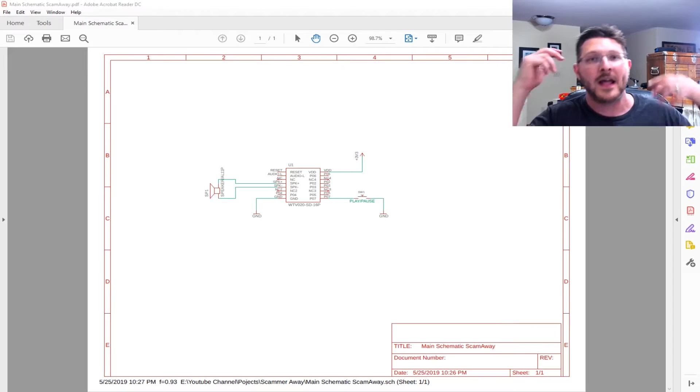So in order to do this, we're going to be using a pretty cool little component that I found. I believe IC Station had this for a little while, but it looks like they discontinued it. They went with a bigger module, and I really enjoyed this one because it was so small.

It was a very small module, but it's the WTV020, and I think there's some other variant, maybe the M01. I have one right here. They are tiny, if you can see that. Hopefully it'll do it, but they are very tiny.

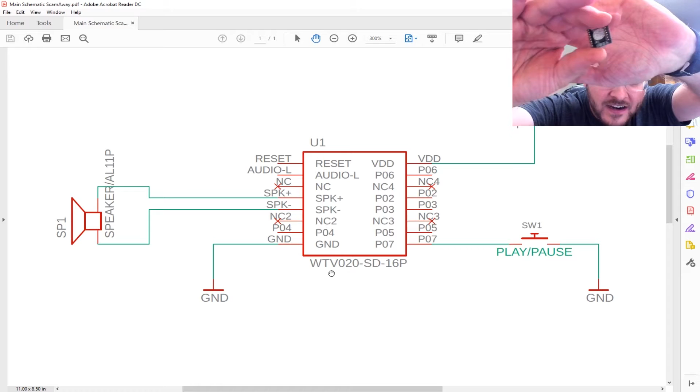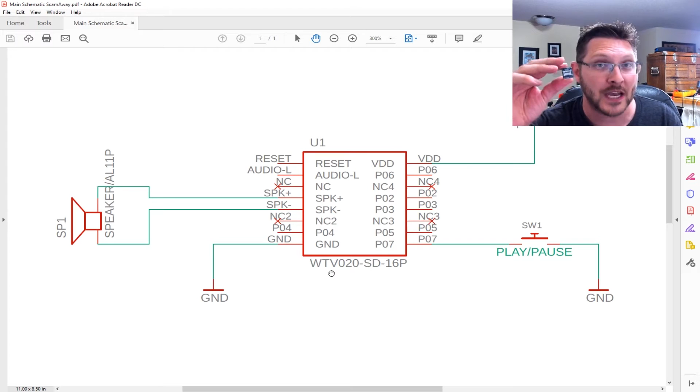Basically what it is, it's a small MP3 player. It takes a micro SD card, so you can buy some cheap little 2 gig one. In fact, the smaller the better, because this can't index very high memory, so you don't want to put an 8 gig in there - it won't work. So what I did is I downloaded some 2 gig, even though it recommends 1 gig or smaller. I got a 2 gig one, and it seems to work just fine in this thing. So 2 gigs is what I'm going to be using. But just find the cheapest card - doesn't need to be fast, just as long as it's a micro SD card, it'll fit just fine in this little guy.

So that will be the first thing we need. We also need a small little speaker, just a simple flat pack speaker. I think I found mine on Amazon - I'll maybe put some links down in the description for you guys, as well as where to find this. Now, where you can find these nowadays is good old eBay, or as AVE says, Fleabay, right? But you can find these.

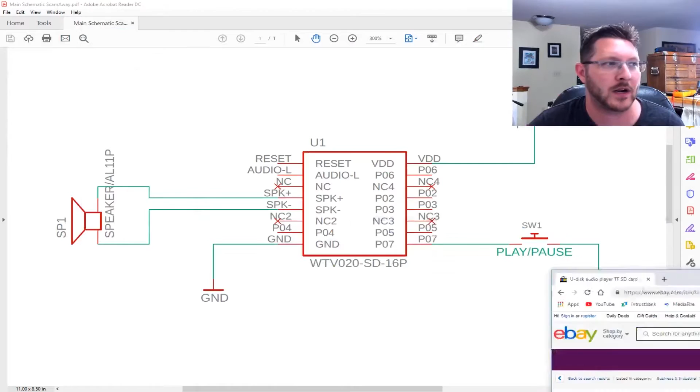They're only a few dollars, super cheap, but these little modules work great for what we're going to be using this for. I'll put links down in the description so you guys will be able to tell. But you just need that, and you just need a little push button, a tactile push button. We'll go through and look at it and see what it is.

So what we're going to do first is, this is the good old schematic. We're going to hook up our VDD. It's a 3.3 volt device, so it's going to be using either coin cell or lithium cell batteries. You don't want over 5 volts.

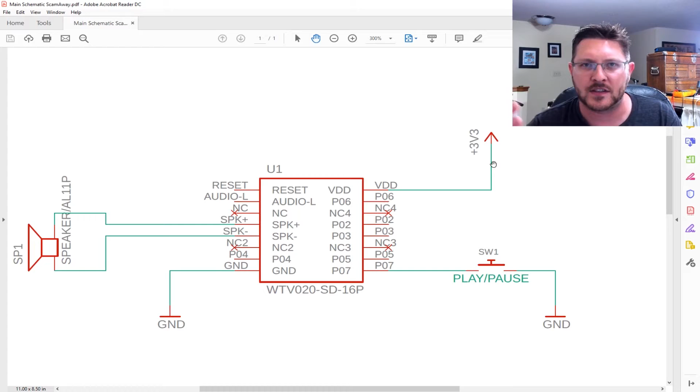Now, there's an option on the board where you have to cut a trace or solder a jumper, I can't remember which, if you want it to run at 5 volts. But you would still have to regulate something like a 9-volt battery to get the 5 volts. Since lithium batteries are generally 3 volts on their own, they work perfectly for this.

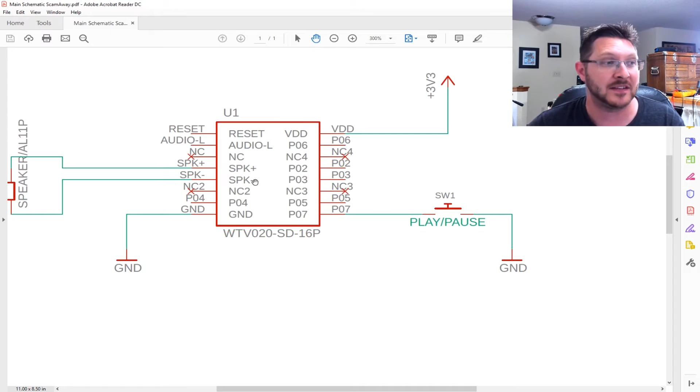So you need a 3 volt and ground. The speaker goes to the speaker pins, pretty straightforward. Then we're going to put in a play-pause switch, so you can press it to play, and press it to stop it once it's done playing. That goes off of pin 7 here on the little chip. So that's it, very, very simple schematic.

So now we need to build the 3D case that this is going to go in. So for that, into Inventor. We're going to build a little case here that's going to have a top and a bottom, and it's basically going to have a little button on the side.

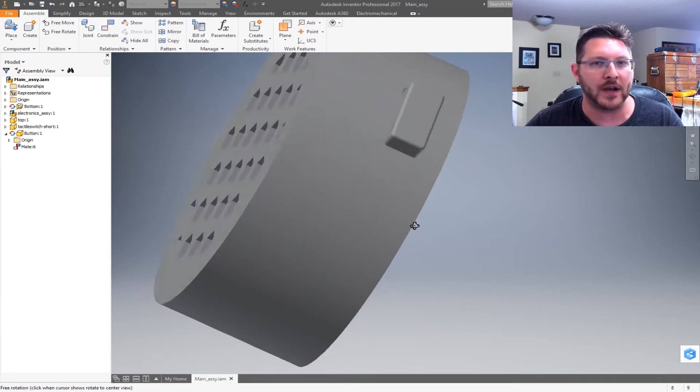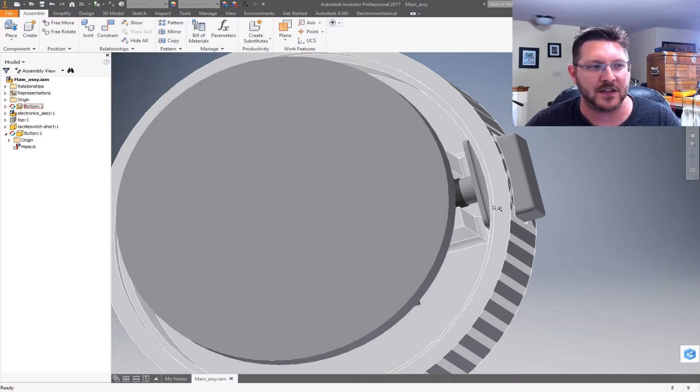Now, I had messed up in my file. I'll probably correct this before I post it for you guys in the link down below. As I'm recording this, I forgot to post this. But basically, if I take the top off of it, I didn't think about getting the switch into it, so you just have to cut this little bridge right here off, or I'll fix that in the model.

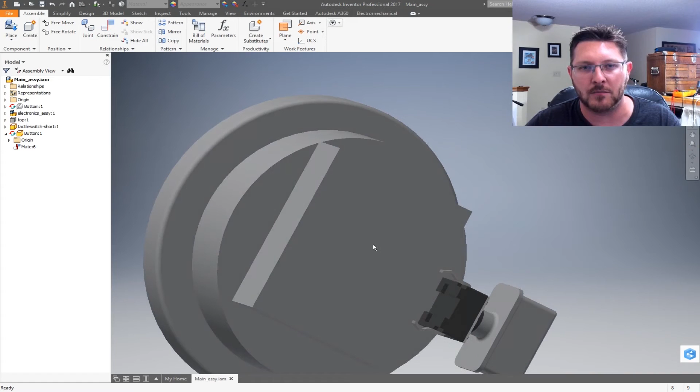But basically this chunk of plastic right here needs to be removed so you can actually get the button in there. What I did was I modeled up the speaker, the coin cell, and the little module as a general idea to get how thick this is going to be. Yes, I know this is hitting right here, but in the actual device it's fine. Just to get a rough idea of the size I have to deal with, I put that together to get sizes.

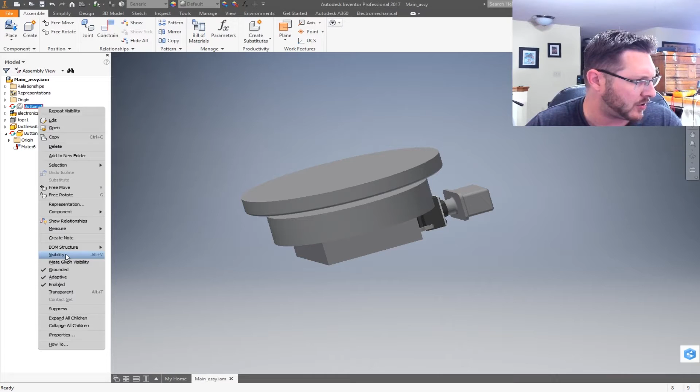So let's go ahead and turn this back on. Let me look over here so I can read it. So there's the bottom. I also made some inside edges, as you can see there's an edge right here, so that way it snaps together.

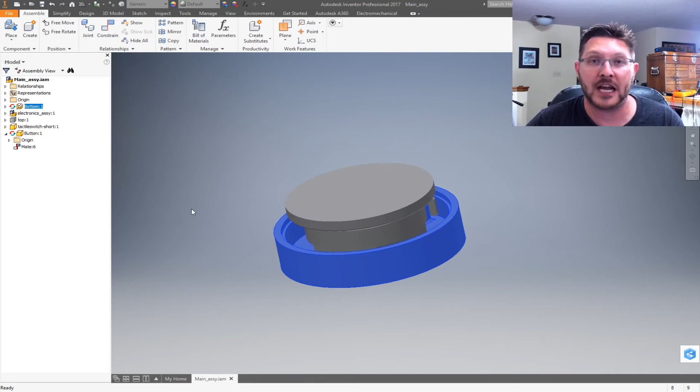So all we've got to do is 3D print out the button and the case, and we should be good to go. Then we'll just make some quick little solder connections to match our schematic here, and we should be good.

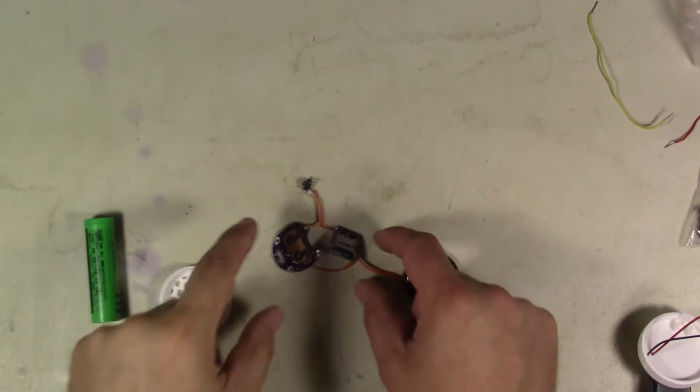Okay guys, so here we are with all the pieces. However, I noticed something that was quite of a caveat. Didn't really realize how much amperage this guy actually takes. So the coin cell battery is not going to be enough oomph for it to actually work right.

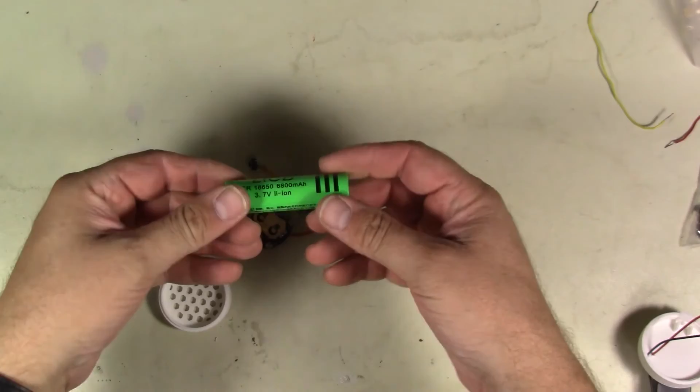So what we're going to do is use one of these 18650 batteries. Problem was this draws so much current, this guy was dropping way below 3.3 volts. It was going down to like 2.5 volts, and it just wasn't going to work for us. So we're going to switch it out to a 3.7 volt lithium ion battery.

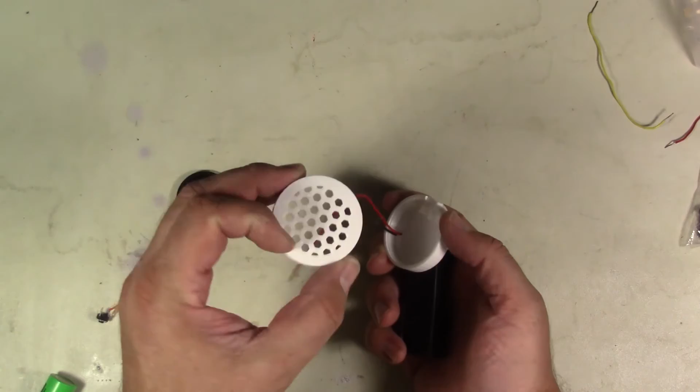So all I did to make this little change is with our cool little 3D print. We've 3D printed the case here, so there's our speaker grill and all of our other pieces.

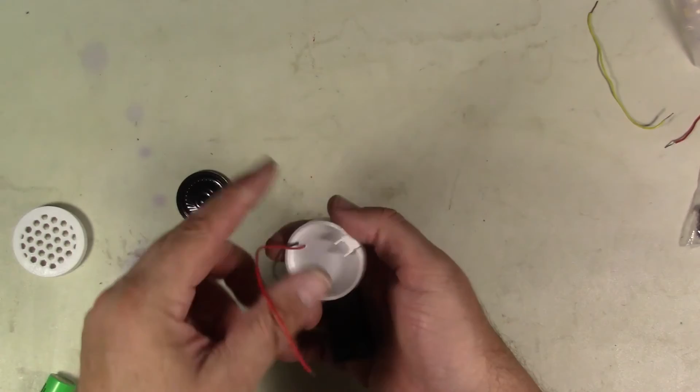What I did was basically just take one of my 18650 battery holders. You can get these off of Amazon or eBay or pretty much anywhere. I just drilled a couple little holes in our package, and then what I'll ultimately do is probably hot glue this onto this guy, and then it'll just kind of click, click, click, click, and we'll wire it up instead, so that way it gives us the extra push that we need.

So I'll go ahead and desolder this guy from it, and we'll solder this all up, and then we should be able to assemble this guy.

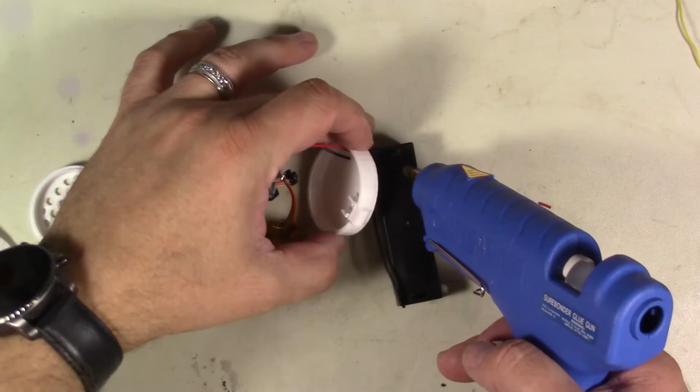Okay, so I've got the good old hot snot gun here, so let's... Alright, now I'm going to attempt to not burn the crap out of myself. Okay, well that was incredibly hot.

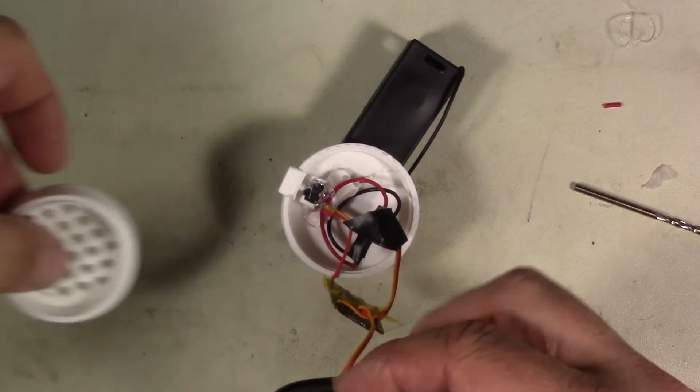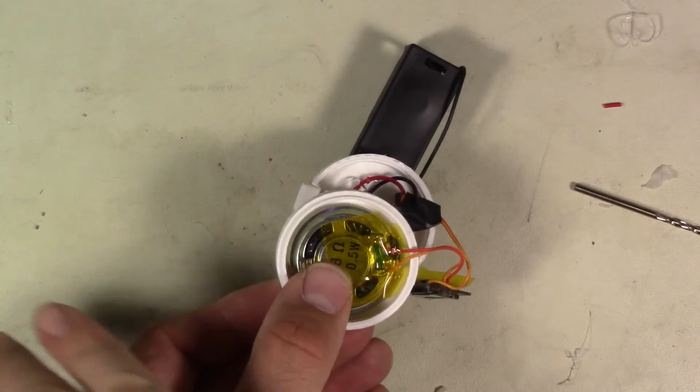Alright, so what we're going to do now is we're going to see if I can maybe put a few blobs on this, except I just stuck that in it. Alright, see if I can put the speaker in here, and then we'll add a couple blobs to the speaker, and we'll see what happens here.

Okay, now that I've kind of smushed that in there, I'm going to see if I can snap the lid on. Go together properly, come on. Alright, oh, I think I got it. And there it is. Okay, so we successfully put it together.

Okay guys, so now we got that wired up a little bit, so now we're going to check out the micro SD card and getting the audio file to actually work.

So what I did was I just perused the internet, found an MP3 file for that internet sound, and so we'll pull up our great tool here, Audacity. So we're going to open this up, let's see, I saved it in here, the sound of the internet. So, basically, here's our sound.

However, I don't know if I like all those. There we go, that's the good one. Okay, so I don't want to hear that dialing and that other stuff, so I'm just going to delete it. So what I'm going to do is select this, and I'm just going to press the delete key. That will get rid of it. Now it should just be the normal sound.

Yep, that sounds good. I'm going to take this tail end stuff off and get rid of that. But now the next thing we have to do is a few different things.

So what we want to do is go up here and select Tracks, and then we're going to come down here to Stereo Track to Mono. Stereo Track to Mono, okay, so it needs to be mono. You don't want it to be a stereo track.

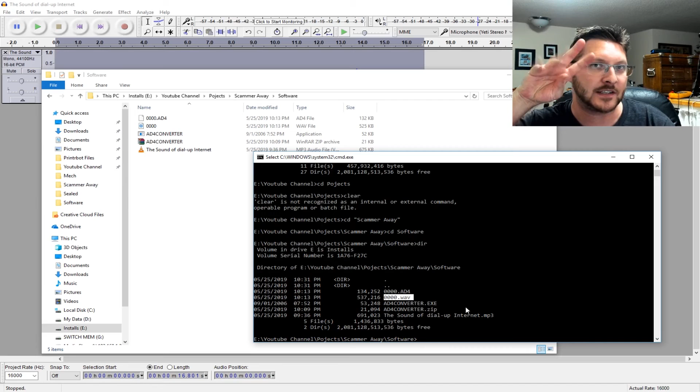So very, very simple. The command that you need to run now that we have the WAV file - you always label them, especially if you have multiple files. You can also do multiple files with this audio tool. So you name them 0000, using 4 digits. It takes a 4-digit number to order them, so however you want them to order. If you want the first one to play, it's 0000, the next would be 0001, 0002, 0003, so on and so forth.

So we're going to name it 0000 since it's going to be the first, and probably the only one that we put on there. But you can put multiple WAV files on this thing if you want to. For what we're doing, we only need one.

So basically what we're going to do is the command we're going to use - let me set some properties here and get the font bigger for you guys so you can see what we're dealing with. So there we are.

Now we're going to run the command: AD4 converter, the exe, and then we're going to run -E4, and then whatever the path to your WAV file would be, which mine is 0000.wav. Okay, and then that should be pretty much it. Then you just hit enter, and it will go ahead and generate the .AD4 file for you.

Now, I'd already run this - I ran it again so you can see that it updated with today's date. But that's all you got to do, and that generates the AD4 file, which will play a whole lot better on this little MP3 player device.

So that's all you need to do. Now, to get this on there, you use this file right here - it says AD4. Just drag and drop it onto your micro SD that you're using, and then install it in the device. That's literally all there is to getting the MP3 onto the device so that way you can play it.

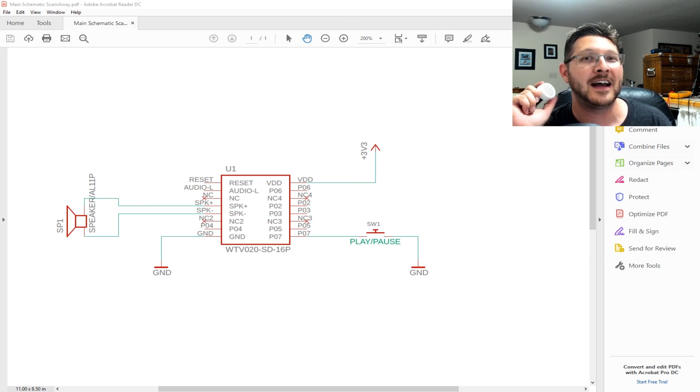That's such a classic sound.